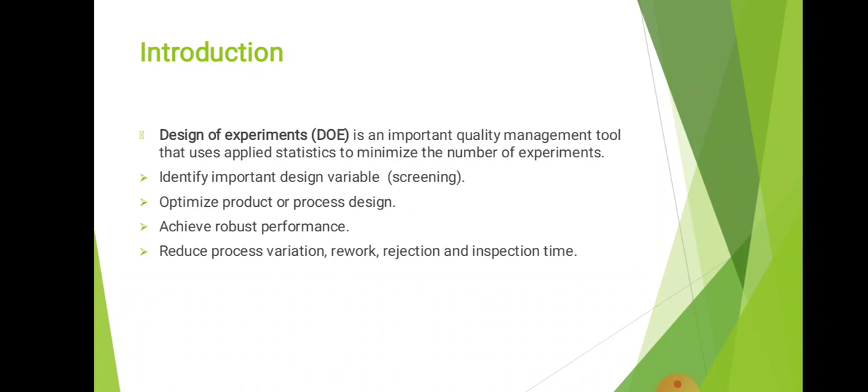Language of experiment. These are the terms used in design of experiment: factor, level, and result. Factors. Anything that has an influence on the performance of the product, like inputs, parameters, or ingredients. There are two divisions in the factors. One is continuous factor, another is discrete factor. Continuous factor has its influence from process start to end, like temperature and time. Discrete factor has influence only for a short period of time, like material, tool type.

Level. Consider temperature as a factor. The status of the temperature within an experiment. As the example mentioned here, 200 degrees Celsius and 300 degrees Celsius. There are two levels. In a similar way, there may be more levels for more factors. Result. Result is a response or the quantity of interest in the final, like performance, etc.

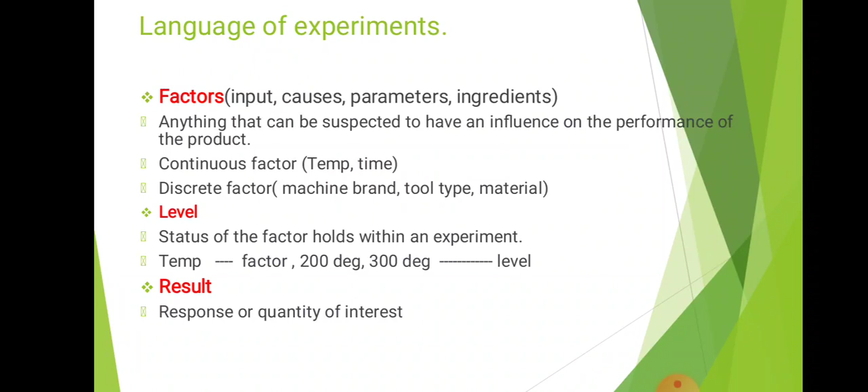I have gone through a paper which implemented design of experiments in its industry, and the main aim is to improve the lifetime of truck tires. The methodology they adopted is the PDCA cycle, that is plan, do, check, act cycle. I will explain the plan, do, check, act briefly.

Plan. In the plan phase, they have gone through several steps. Definition of strategic framework, analysis of current state of tire consumption, identification of causes which influence the tire deterioration process, execution of screening experiment, design a full factorial experiment. All these things will be explained in further slides.

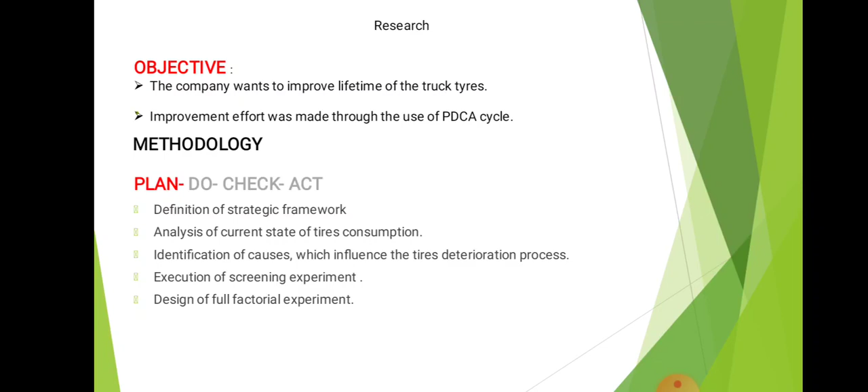Do. The do phase deals with the realization of the experiment. The full factorial experiment designed here is conducted in the do phase. For this, they have chosen a route from Košice in Slovakia to Onesti in Ukraine. It's up to 2000 km, and they have conducted a 2^4 factorial experiment. The deterioration was measured by the tread depth gauge, which has accuracy of 0.01 mm.

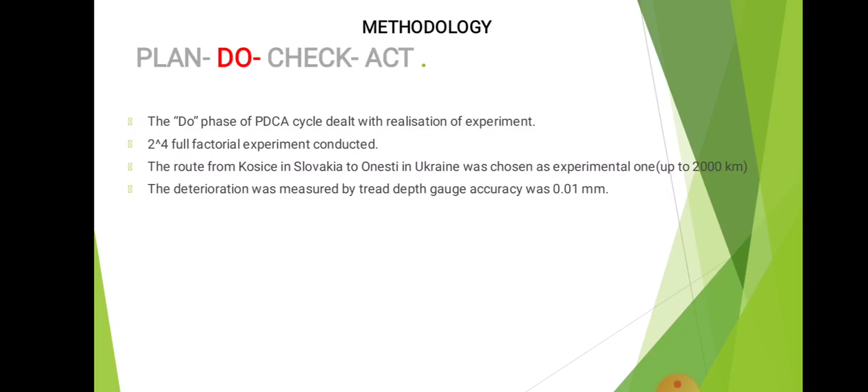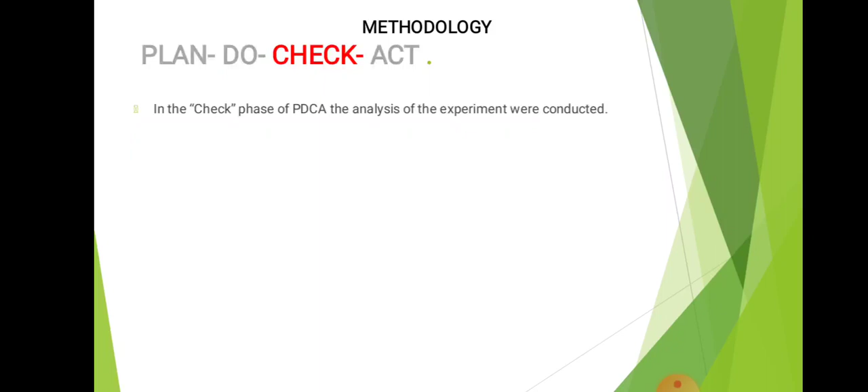In the check phase, they do analysis of the experiment conducted in the do phase. First they determine which factors are significantly affecting the deterioration of the tire tread, then analysis of those factors and their level of influence, and finally optimization of those factors in order to get the improvement in the lifetime of the tires.

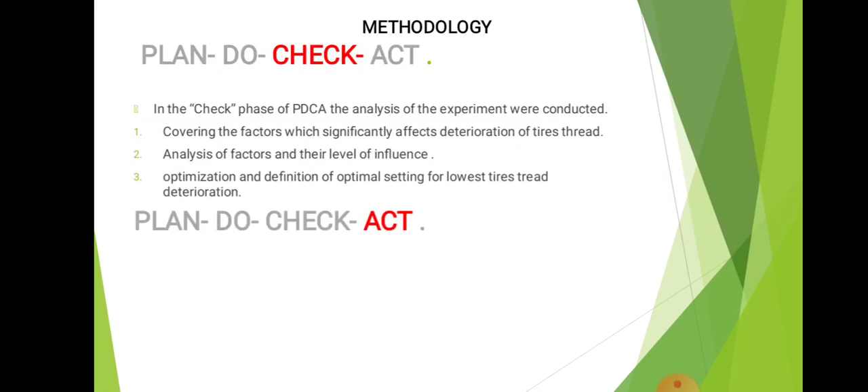Act. In previous phases like plan, do, check, they have got the optimal setting values that will be implemented in the act phase. Okay, first plan. In the plan phase, first one is strategic framework. Strategic framework was used to describe the limitations and the boundaries to the improvement effort. Like, what are the boundaries? The improvement action cannot have a negative impact on the stakeholders, the fuel consumption, or the truck safety. There should not be any negative impact on society and truck safety, etc.

This is the life cycle of a tire in the company. First comes purchase. They purchase the tire from the suppliers or manufacturers, and use it up to its lifetime. After usage, it will go through testing. They will measure its performance and its parameters. If all the parameters meet the standards, then the tires will be used once again. Otherwise, tires are decommissioned and recycled. If they want to reuse it, tire retreading will be done. Again, that will be reused.

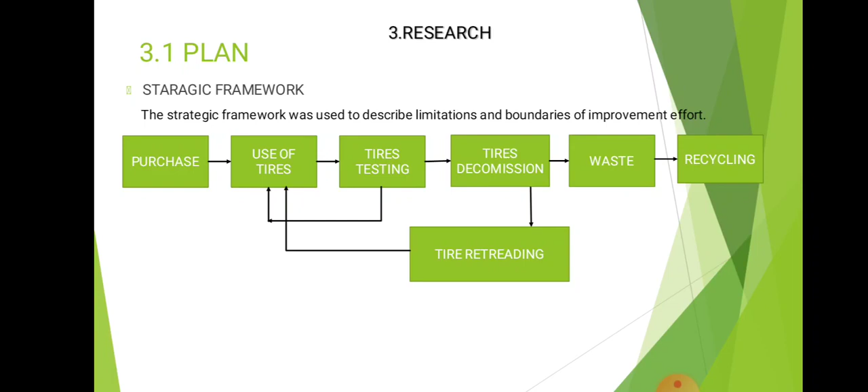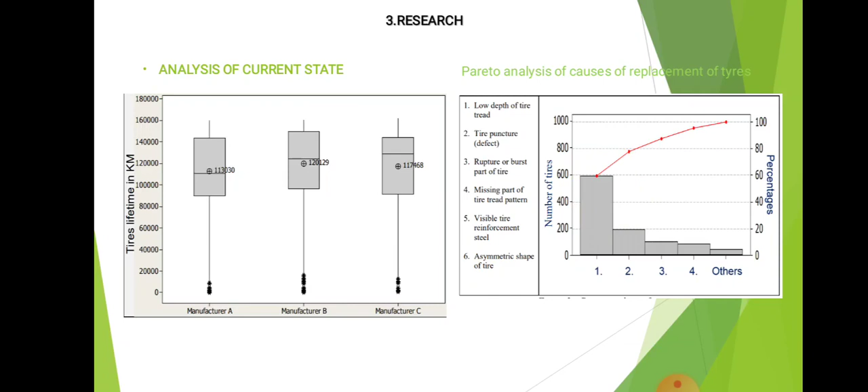First one is tire deterioration. Second one is tire puncture. Third one is rupture or the burst of the part of the tire, and etc. As in the diagram, the first one, low depth of the tire tread or tire deterioration, plays 60% of the replacement. So in further studies, we'll get to know about it.

Next is the screening experiment. The factors selected for screening experiment are here. First one is driving technique, tire price, tire inflation, types of tires, truck type, and length of the tire storage. These are all the factors that are affecting the tire replacement or tire deterioration. Levels, there are two levels.

After doing the experiment, we got to know about the important factors. First one is A, which is showing red here. A, driving technique. B, tire price. And C, tire inflation. And F, truck type. These four factors are mainly affecting the tire deterioration. Hence, after conducting the screening experiment, next step is full factorial design of experiment.

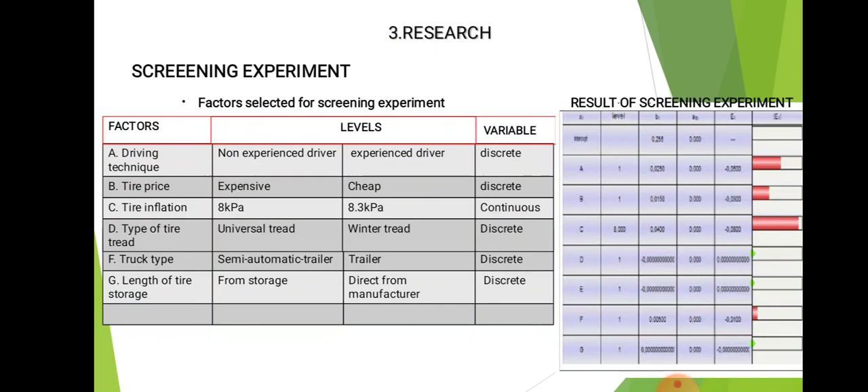In full factorial design of experiment, they will design the experiments. Here, a 2^4 plan is used. Why is the 2^4 plan used? As mentioned here, there are two levels and four main factors obtained, like A, B, C, and F. Hence, 2^4 will be 16. Hence, 16 experiments will be conducted in order to get the optimized value.

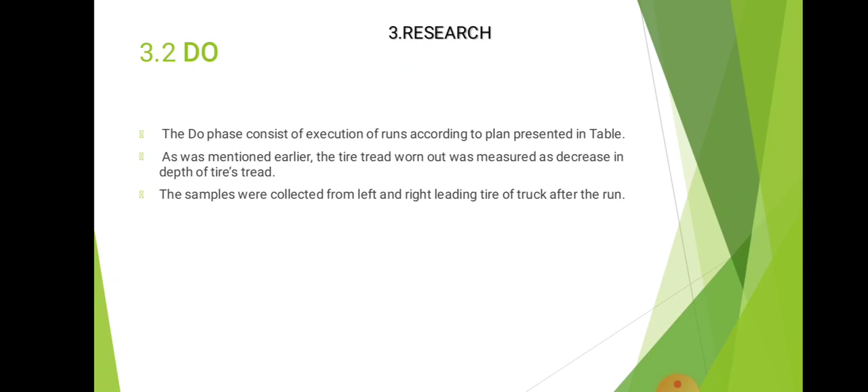Next one is do phase. After plan, the next phase is do. In do, the 16 runs as got from the DOE will be implemented on the road, up to 2000 kilometers. And here, after conducting the experiment, the tire tread wear was measured as a decrease in the depth of the tire treads. The samples of both left and right tires will be collected after the run.

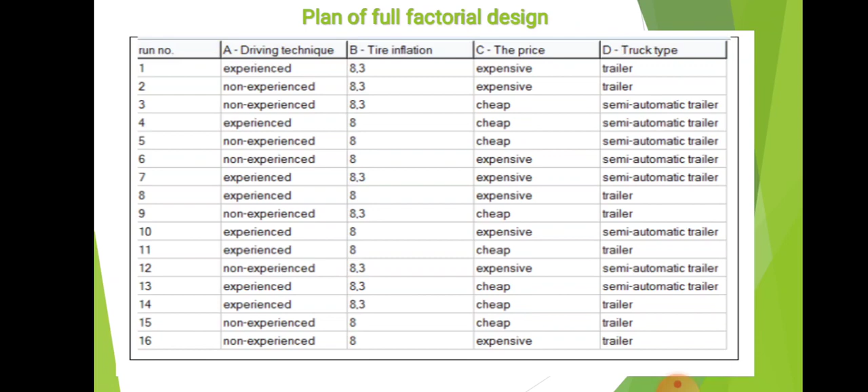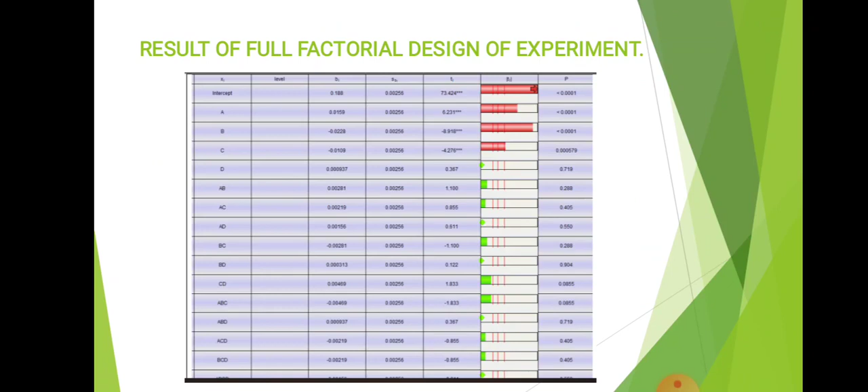This is the plan of the full factorial design. These are the 16 runs, and these are the four factors like driving technique, tire inflation, price, and truck type. After conducting the do phase, the result is in a brief way. But after this, the result is shown in a proper way, like here in the graph as mentioned in this picture.

Based on the figures, it can be claimed that tire inflation has, from all examined factors, the most significant impact on the depth of the tire tread. And second result is the parameters that have their optimum values. It was estimated that an experienced driver causes approximately 21% less tire tread wear than a non-experienced one.

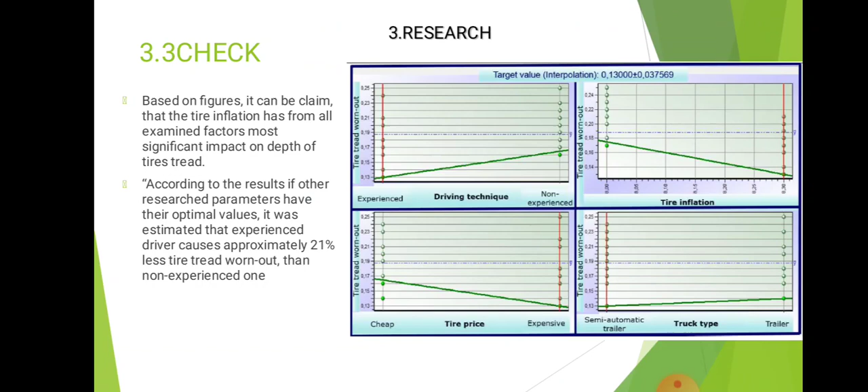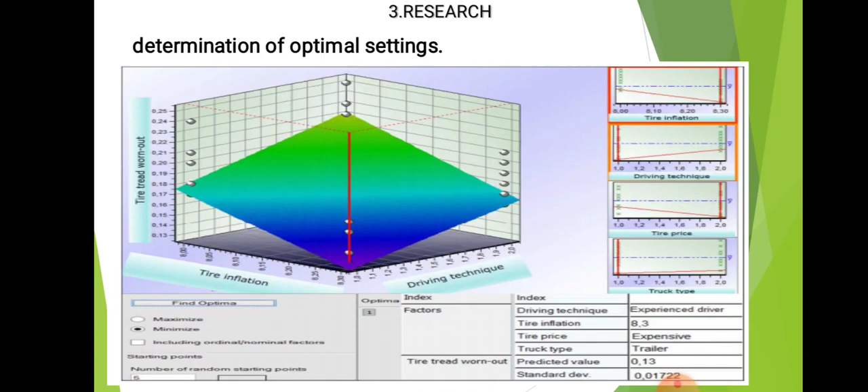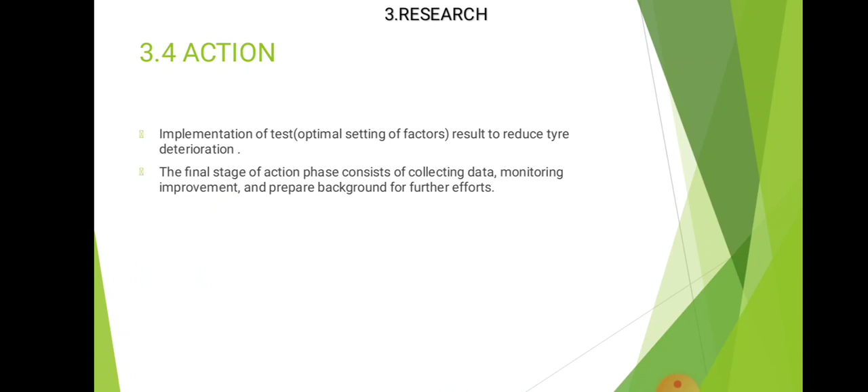After plan, do, check phase, there will be act phase. To act, we need optimal settings. Here we got the optimal settings. That is driving technique, experienced driver, tire inflation 8.3, tire price expensive, truck type trailer. All these data are being implemented in real time, and again collecting the data, monitoring the improvement, and preparing the background for further efforts to improve the lifetime more.

Conclusion: the presented improvement effort is a typical example of a low cost experiment. The whole experiment was conducted from internal sources of the organization. It does not recognize any extraordinary increase of cost during the length. The experiment identified 3 significant factors and led to implementation of 4 corrective actions, which do not require any additional cost.